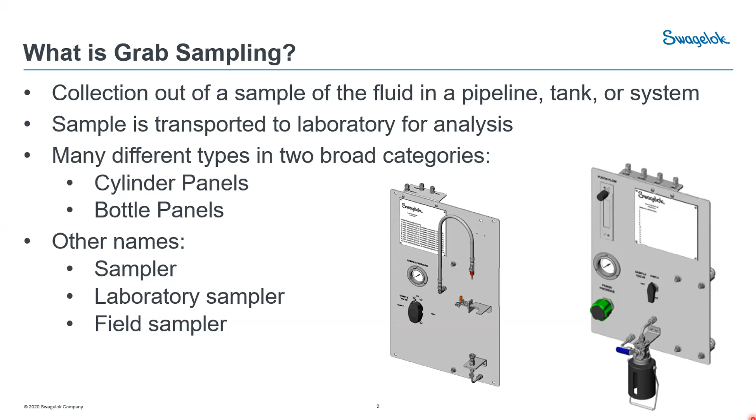Sampler is probably one of the more common ones - lab sampler, field sampler - but that all amounts to the same basic thing. So why are we actually taking a sample? There are a lot of different reasons why you might need to take a sample. One is, of course, to validate the process conditions, making sure that the product you're manufacturing meets the specification, either at the end of the process or at some point in the middle, coming out of one unit and heading into another, making sure you're delivering product as expected.

It could be that you're validating online analyzers. So for example, anytime you have an online analyzer installation in the field, chances are you have a grab sampling installation as well to validate the results of those analyzers periodically.

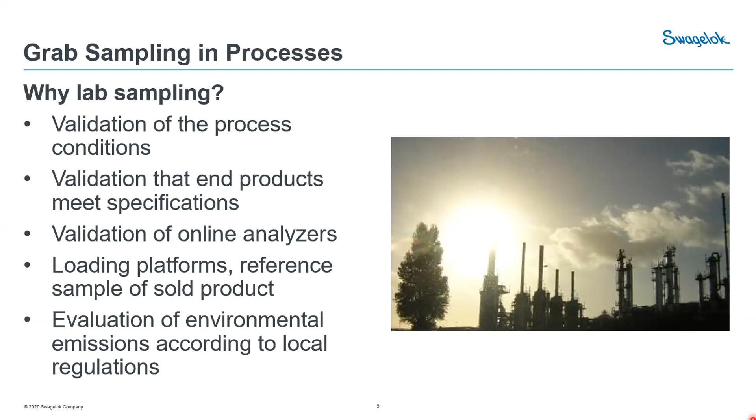Loading platforms is another popular one, where anytime you have a change of custody, very often you're going to be taking a reference sample so you can go back and analyze it later if there's a problem. And finally, environmental concerns are growing - no matter where you are in the world, regulations are only increasing with regard to emissions. So measuring the flare gases and things of that nature is definitely one of the great applications for grab sampling.

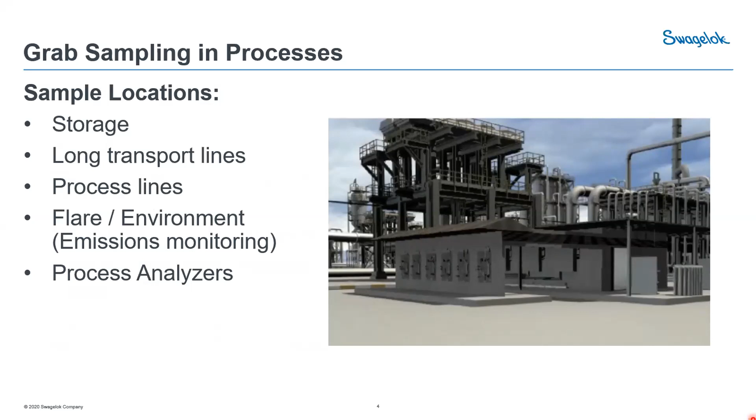With all those different applications, you're going to find these samplers in a lot of different places around your facilities - whether it's at storage facilities out at the tank farm, on transportation lines between facilities or from one unit to another, or on the process lines within the facility. We just mentioned the environmental aspects, monitoring emissions, your flare gases, and we also mentioned the process analyzers and validating those process analyzers.

So what is the difference between grab sampling and an online analyzer? There are a lot of different pros and cons in terms of one versus the other. So let's take a look at some of those.

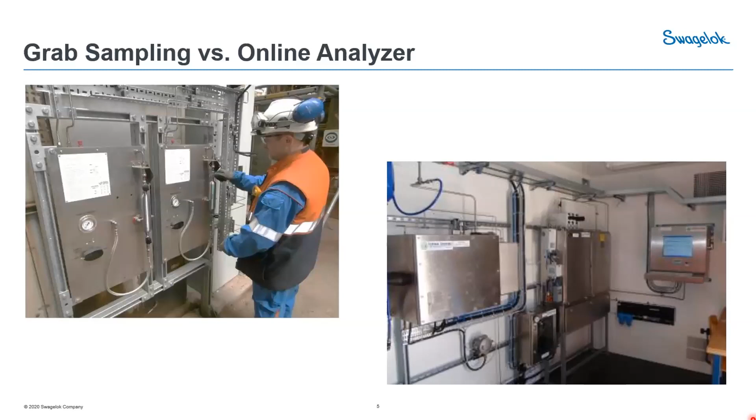So grab sampling - one of the great advantages is it's much less expensive. You're able to have multiple grab sample panels all feeding a single analyzer back in the laboratory. So the cost of the grab sample panel and the cost of that installation is significantly less than when you have an online analyzer.

It can generally be installed much closer to the process. With a grab sample panel, it's relatively small - you can fit it usually within a few feet of the process line, or at most maybe 50 feet away. With an online analyzer installation, it's generally going to be installed in some sort of shelter, and you have to find some real estate to build and install that shelter. So those are generally going to be much farther away from the process, from the sampling point.

And also it allows you to concentrate your laboratory expertise in the laboratory, your analytical expertise, so you don't have to distribute that throughout the facility and have those experts going around to maintain and take readings from different analyzers.

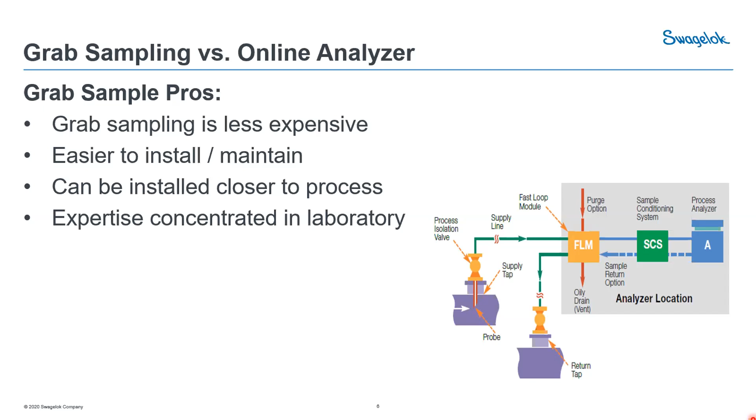Now, of course, there are some drawbacks to grab sampling. The biggest one is time delay. With an online analyzer, you can get essentially real-time results - the gold standard is that you can get a result within 1 minute of extracting that sample from the process. With grab samples, obviously you can't do that. There's a significant time delay between when you take the sample, collect it in the sample container, and then by the time it gets transported back to the laboratory and has to be in queue there, it could take hours or sometimes even days before that sample actually gets analyzed.

It's also harder to maintain the sample at the process conditions. Even though it's relatively close to the process, by the time you get it into that sample container and transport it, and wait through all that time delay, it's harder to maintain that sample at the phase, temperature and pressure conditions of the process. So it might not be representative anymore.

And it's potentially more dangerous. By their nature, grab sample panels introduce human beings into the sampling process, so as a result you are inherently making this a more dangerous operation than an analyzer that operates by itself remotely. And then, of course, sample purity can be an issue if the sample containers are not properly cleaned and maintained. So some potential problems there.

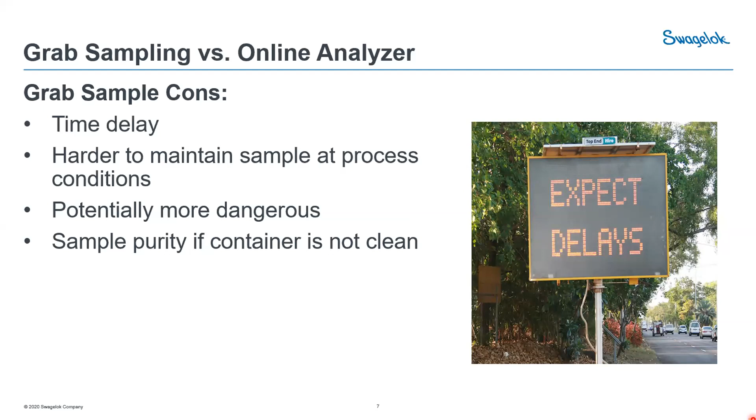Let's take a look at some sampling system basics. There are a few different rules of sampling. First of all, we want our sample to be representative, meaning we want to make sure that our sample is essentially the same as what it is that's in that pipeline.

So we want to avoid phase changes, because when we start changing phases from liquid to gas or vice versa, we fundamentally change the sample itself. So we definitely want to avoid that.

We want to use probes where we can to make sure that we are sampling from the middle of that pipeline, and not taking it from the wall of the pipe. If you're sampling on the bottom of the pipe, you could potentially be collecting contamination. So using probes helps with the representativeness of the sample.

We also want to be timely with our sample, to the extent that we can. Obviously, grab sampling and transportation is not as timely as, say, an online analyzer installation, but we still need to get the sample from the process to the panel in a reasonable amount of time. And we need to understand how long that time is, so that we know what sort of process corrections we need to make based off of those results.

Also, we need to make sure that our sample is pure. We don't want to contaminate the sample. We want to avoid dead legs, make sure there's adequate purging and flushing, and make sure that we use clean sample containers.

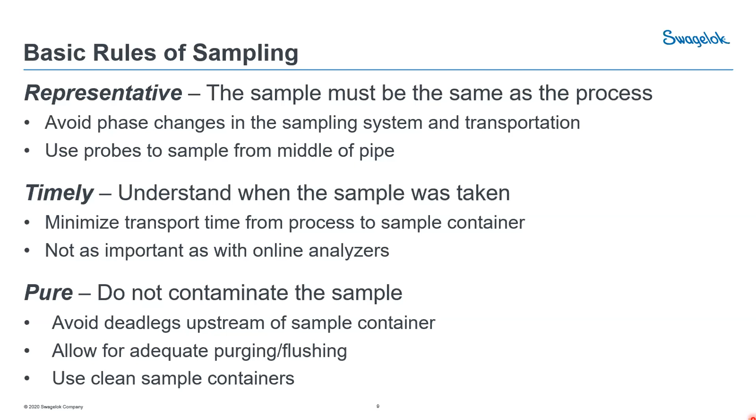So anytime we have a pressure gauge or something like that, we want to put that on the downstream side of the sample container. That way we're not contaminating our sample.

We also need to understand the behavior of our samples. We need to understand that a gas is compressible, but a liquid is not, and we need to understand how changes in temperature and pressure are going to affect our sample. For example, with a liquid sample, as we increase temperature or decrease pressure, we can potentially vaporize out some of the lighter components in our sample.

So if we have a sample that's here in our phase diagram and we decrease our pressure, what's going to happen? Some of those components might move into the gaseous state, and now we've changed phase and potentially fundamentally changed our sample. Likewise, with a gas sample, you have to worry about dropping the temperature or increasing the pressure - the same thing can happen, going from the gas phase and condensing into a liquid phase. We definitely want to avoid that phase change because it can and will change the composition of the sample.

So anytime we can maintain the sample at the operating or process temperature and pressure, it's to our advantage, because at that point we're avoiding changing that sample.

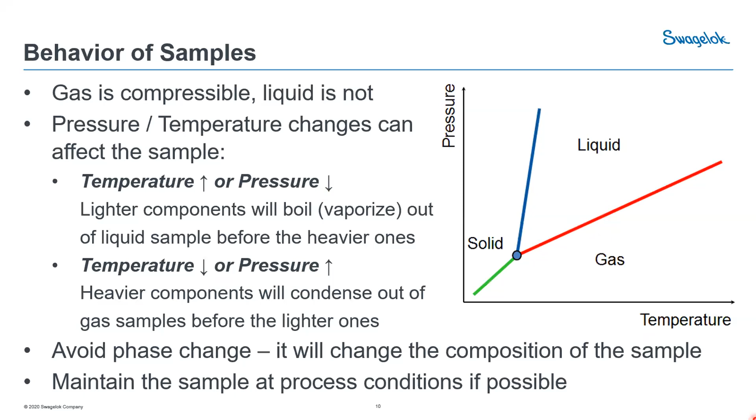So we talked about the two different types of sample containers, two broad categories: sample cylinders and sample bottles. How do you make the selection between one or the other? Well, cost is certainly a driver. Bottles are definitely less expensive than a sample cylinder.

Also, you have to worry about the sample pressure. If it's something we have to hold at a pressure in order to maintain the process conditions, then a bottle is not going to be suitable, because bottles are not intended to be pressure containing.

Also need to worry about things like toxicity. The toxicity of the sample is definitely important - you'd want to steer towards a sample cylinder in that sort of application if you have a really toxic sample. It's just a more secure way of transporting something that could be hazardous to personnel or to the environment. And of course, we need to worry about that sample volatility.

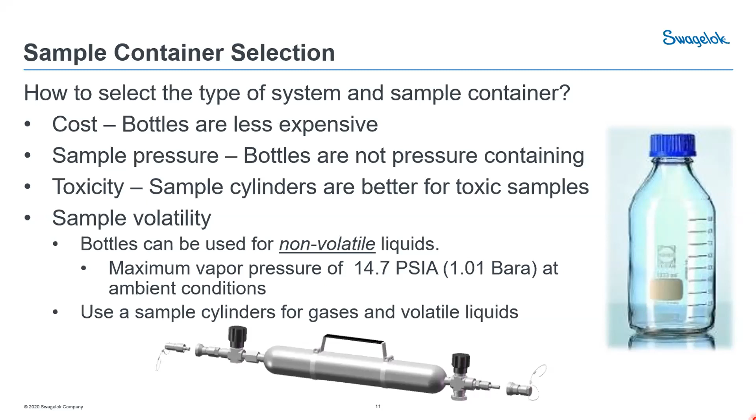If we need to hold that sample at pressure in order to keep the liquid from vaporizing, then again, a sample cylinder is the way to go, because that sample bottle is not intended to be sample or pressure containing.

Looking at an example that most of you are probably familiar with, we have a distillation column here. You've got the basic function of the refinery: the crude oil comes in, you boil it at the bottom, and then you recondense at different levels, and different products come out at different levels. Up at the top, you have your real light gases, your LPGs, your methanes, that sort of thing coming out at the top.

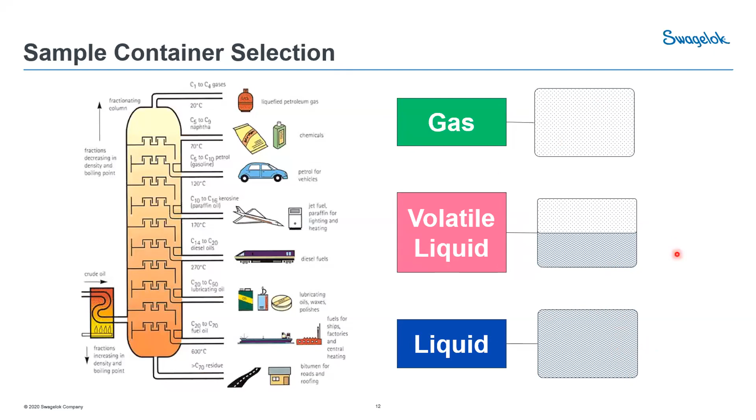Down at the bottom, you have your real heavy things. Those are always going to be liquid. And then here in the middle, you have your volatile liquids. So this is where you need to worry about what sort of sample container you're going to use. Gases, obviously, we're going to use the sample cylinders. Liquids, we're definitely going to use the bottles, unless it's toxic. But here in the middle, it's kind of up in the air, so we have to look at the vapor pressures and the boiling points.

So here, looking at a list of different hydrocarbons, we can see our atmospheric boiling points for all these different hydrocarbons. And if we look at pentane, for example, we see it has a boiling point of 36 C. We're probably going to be able to get to that boiling point pretty easily, especially down in Alabama - maybe not up here in Cleveland, but definitely down there. So definitely have to worry about that being a volatile sample.

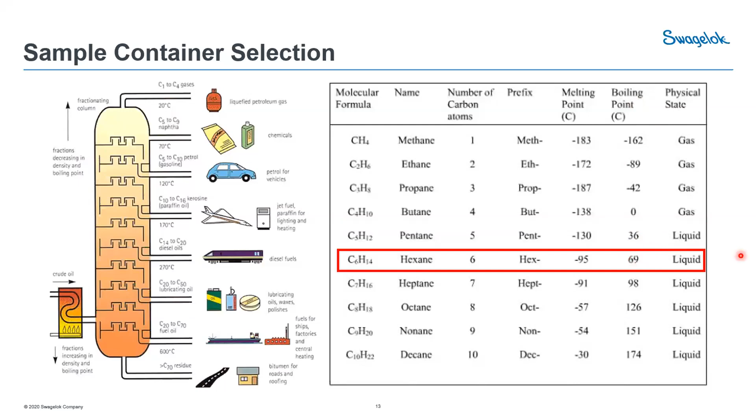Whereas hexane, we've got 69 C. Not much chance of getting to 69 C in atmospheric conditions here in the United States or anywhere in the world, really. So that's about where we draw our distinction, between hexane and pentane. Anything above that line, you really need to use a sample cylinder to keep that sample contained. Anything below that line, those are your heavy liquids, your non-volatile liquids, where you're not worried about that sample vaporizing.

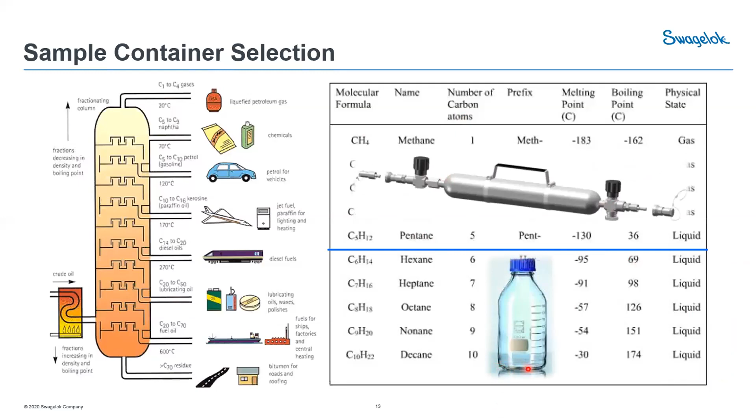At this point, I'm going to hand it off to my colleague Eric Kavarda, and he's going to talk about some standard sample system designs that we've developed here at Swagelok.

One of the main features of the grab sample module is what we call our geared valve assembly. Now what we've got here is a single handle that turns the positions of 3 different valves. So if we were to look at this grab sample panel, and it may be engineered locally or it may be engineered 20 or 30 years ago, the operator may have to come in and turn 2, 3, 4, 5 valves in order to sequence the valve operation in the right way so that the sample is taken in the proper container and it's taken safely.

Well, that's a lot of decisions to make when somebody comes up to a panel. So even if the instructions are well laid out right in front of them, there's still an opportunity for that operator to perhaps make a mistake. And as Matt mentioned, if you have some toxic or dangerous liquids, that could potentially put them at risk. So what we've done is combine that function into one geared valve assembly where you can see one handle. That CAD drawing in the middle has some gears that all rotate together and turn those valves to the correct position at once - a much safer way to do it than if an operator had to turn multiple valves in a certain sequence.

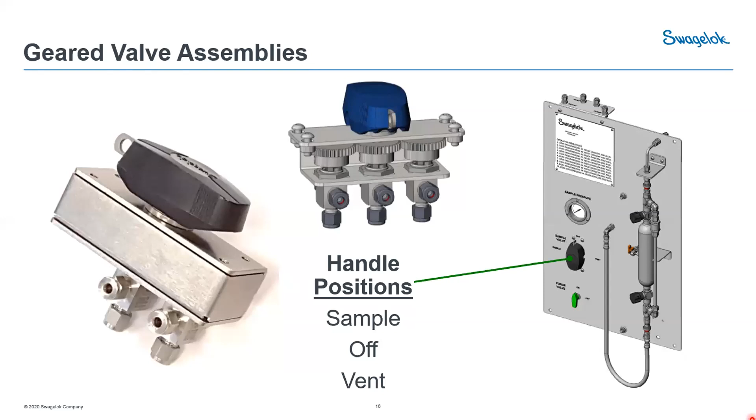Within the GSM product line, we have different options, so it's a fairly configurable product line. We have two different flow paths: one is a standard flow and one is a continuous flow. We have different selections for liquid or gas. You cannot generally use the same sample panel for a liquid versus a gas application. There's a principle I'll get into in a little bit that'll explain that.

For systems where you have something that's very toxic or unsafe, you may want to run a purge line. In the case of a liquid, you could purge it potentially with water or some sort of solvent. In gas, you're generally going to purge that with your plant nitrogen. So we can offer that as an option in the panel.

And then of course the cylinder sizes, it's completely up to the customer. There's a wider range of cylinder sizes available, from small cylinders in the 150 cc range up even beyond a 1000 cc sample cylinder. Quick connects are the next choice to make.

Swagelok has a few different quick connect lines, depending on whether you want elastomers in there or if you need an all Teflon seal in your quick connect, we can provide that choice.

And then there's a relief valve option for safety. If something were to happen and the panel becomes overpressurized, this is an area where an operator is going to be standing right in front of that. So if there's an upset condition and the operator is standing in front of that panel, we want to be able to relieve that pressure and certainly not have it potentially harm the operator.

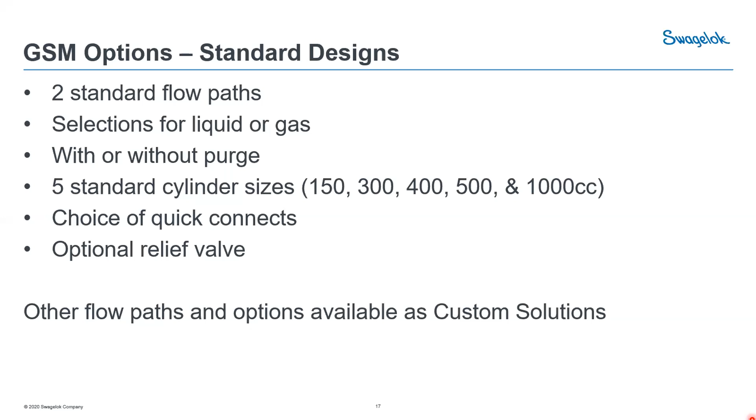And these are our standard designs, and then there's always the custom ones. So one concept, we're not really limited to what you see on these slides here. We can do something that's custom from the ground up or from a napkin sketch.

So let's talk about liquid versus gas a little bit. The main difference between a liquid sample station and a gas sample station, and again we're talking about sample cylinders here, is that the liquid is going to fill from a different direction. In a liquid system, you're generally going to want to fill that liquid from the bottom up through that sample cylinder, while in a gas system, you're going to want to fill that cylinder from the top down.

The main reason you want to fill a liquid system from the bottom up is there's going to be trapped air in that sample cylinder when you install it, and that air needs somewhere to go. If you were to fill that sample cylinder from the top down, there's a pretty strong potential that air wouldn't go anywhere. It would just bubble at the top of the cylinder and it would be very difficult to flush all that air downward. So in the liquid system, you fill it from the bottom up and it allows the air to easily escape, and if you have an outage tube, it works perfectly with the function of that.

The gas system is the exact opposite. If you have any entrained liquids or some dirt or solids in there that you want to flush out, filling that with the gas from the top down will allow gravity to do its job and take those particles and push them out the bottom of the cylinder.

Another feature you may see that's a little bit different here is where the hose is located. Often there's going to be a hose on the grab sample panel. One end of the sample cylinder is going to be tightly fixed to rigid tubing, while the other one's going to have a flexible hose. We always want to have that hose downstream of the sample cylinder.

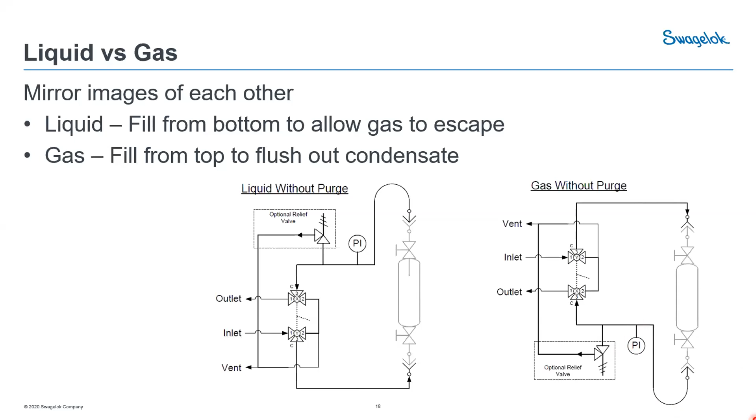The same concept applies with the hose. If it's a smooth bore Teflon hose, maybe not so much of a concern, but if we're talking about a flexible metal hose with a lot of corrugations, those are very small dead legs, an opportunity for old fluid to get trapped in there. And with old fluid, if you're filling it in the opposite direction, that could contaminate your sample, or at least make it a very long time until fresh sample could be assured to be in that sample cylinder.

Another great feature is that these are highly configurable. So if we were looking at our application guide, in other words our catalog for this product line, we'd be able to go and make a few different decisions and completely configure the standard product on this.

So smart part numbers, the GSM, we're making a decision whether it's a gas or a liquid. Is it a standard or a continuous flow? Then there's a pressure gauge, so what's the range on that? We're then selecting quick connects. We're selecting if we want a relief valve or not. And then we're selecting our cylinder size and whether it's a purge system.

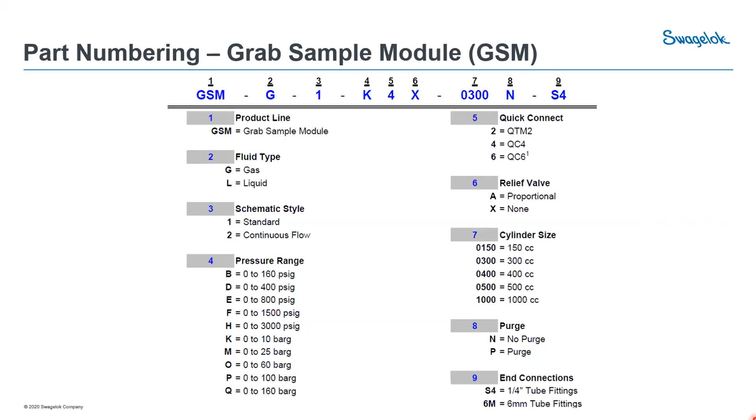And I assume mostly here in the United States, we're going to be working with quarter inch tubing, but when we're talking about our overseas customers, they generally want to convert that to metric at the edge of the panel.

So let's look at what the P&ID looks like for some of these systems. This is the GSM, and it's a standard flow, and it's a liquid module. This is what the P&ID would look like if I were an operator walking up to it. That sample valve, that geared valve assembly, would be in the off position.

Now, the first thing I'm going to do is walk up, and maybe the cylinder is already installed. Often the hose would just be connected to the other quick connect, or there may be a cylinder in there, or I'm going to grab a cylinder out of the bike or out of the truck and install it. And then I'm going to move this towards the sample position.

As we do that, we've got some fluid coming in that inlet, and it slowly fills up that cylinder. A good sample procedure is to wait a little bit of time, maybe one to two minutes if possible, just to ensure that anything that was in that sample cylinder flows out the top so that the sample you're taking is as fresh as could possibly be.

So after the sample cylinder is filled up, I'm then going to turn that position again to the off position. And now the panel is completely isolated. The cylinder valves are not closed, but the panel is completely isolated from the process, and there's no flow going through there. But I can't yet remove the sample cylinder.

I need to turn those sample cylinder valves off, very important. Even though the quick connects at the end of the sample cylinder may be what we call a double-ended shutoff, that would shut off when they're opened.

If you do that at a high pressure, you'll have a couple things going on. One is you get some natural spillage out of that quick connect. And the second is sometimes we'll exceed the pressure rating of that quick connect when it's opened or closed. One thing to be mindful of: the quick connects have a pressure rating when they're coupled, but often a lower pressure rating when they're being coupled and uncoupled.

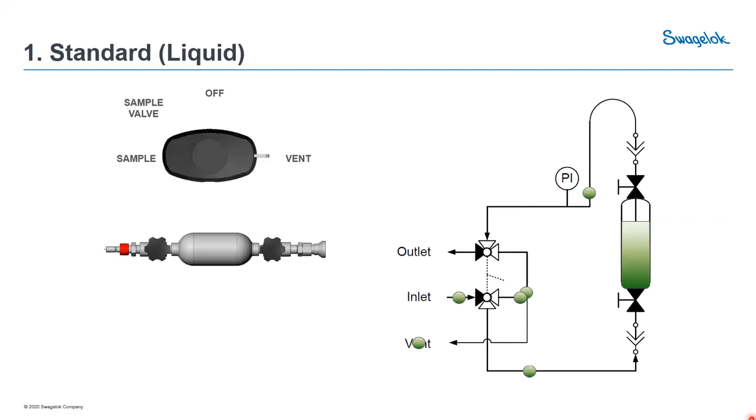So continuous flow, the main difference is that there's always flow through the panel. It's going in the inlet and coming to the outlet. It's not always going through the cylinder, but there's always flow through the panel.

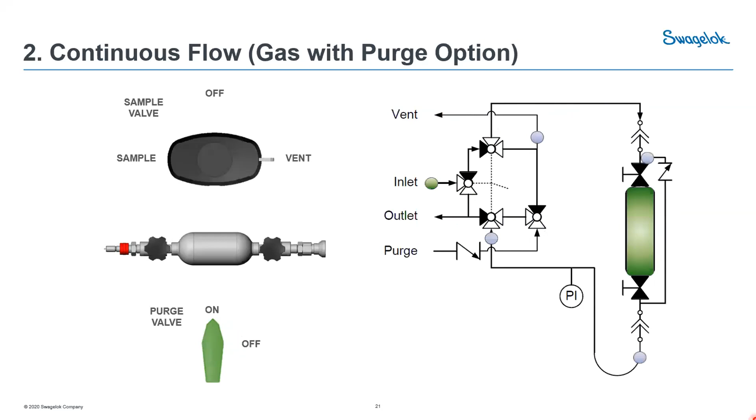Okay, let's look at the second concept here, which is the GSC, the grab sample cylinder. So often panels are purchased without the cylinder in place. The main reason is our customers would like one grab sample panel, or maybe they would like 10, but they'd like 2, 5, or 50 different grab sample cylinders, because there's often going to be a lot more grab sample cylinders than there are sample panels. So we generally sell those separately. They can be sold together, customized, but we generally sell them a little bit separately.

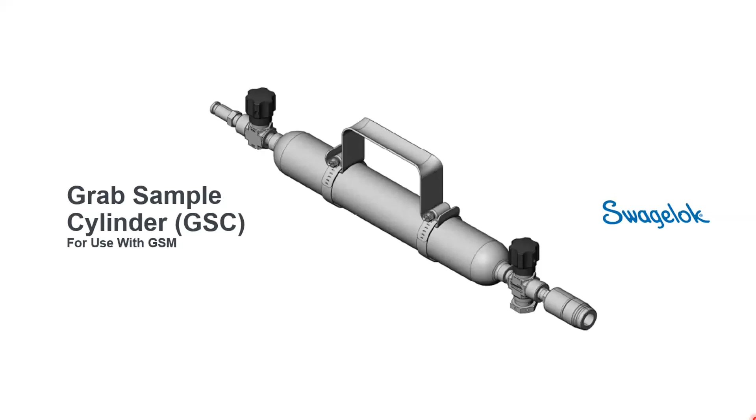So we have some different options for the GSC based on our 5 standard cylinder sizes, different valve ends. We have different materials of the cylinder, different materials of the valves. Stainless steel 304 or 316 is most common. Monel is also common, although not as common as stainless steel. If you are installing this into a panel with a purge, you need a sample cylinder with a purge option as well. And then again, we have the choice of different Swagelok quick connects that could go on there.

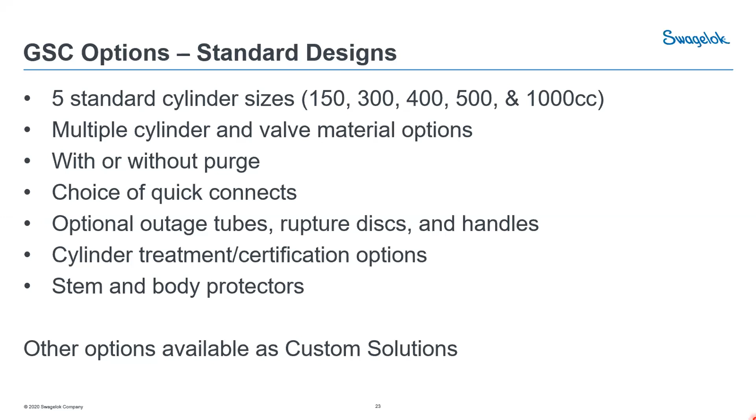If it's a volatile sample, you may want an outage tube. You may want a rupture disc also for safety. And then you may want a handle on that cylinder so you can carry it around with ease. Different cylinder treatment or certification options. A treatment may be Silcosteel inert coating or Teflon coating. And then it's not uncommon to have stem and body protectors on those quick connects, so the customer or the operator can couple something to that. As it's being transported, it's just a better option to keep those safe and keep those protected. And then of course, almost any option is available as something that's a custom solution.

Then our third system is the GSL, the Grab Sample Liquid. And this is for the liquid bottle style. So we would not be using this generally for a gas system. Within the GSL system, now we have 7 different standard flow paths, from extremely simple to quite complicated. I'm not going to go over all those 7 right now just for the sake of time. But we do have different options.

It's not uncommon for liquid sampling to need a sample cooler, primarily for operator safety. As Matt showed, this could be a glass bottle or a plastic bottle. And if you have a sample fluid that's very hot running through there, you could exceed the temperature rating of some of your elastomers. Or maybe even more importantly, if your operator grabs that bottle with a bare hand, they could burn themselves. So we want to make sure we keep the operator safe. And to do that, we can run a sample cooler upstream, basically the first component on the system to cool that sample down to something that's a lot more safe and a lot more manageable. Different bottle sizes, small at 50 cc's all the way up to about 1,000 cc's, and different materials. Viton is pretty much standard. FFKM or Kalrez is another option as well.

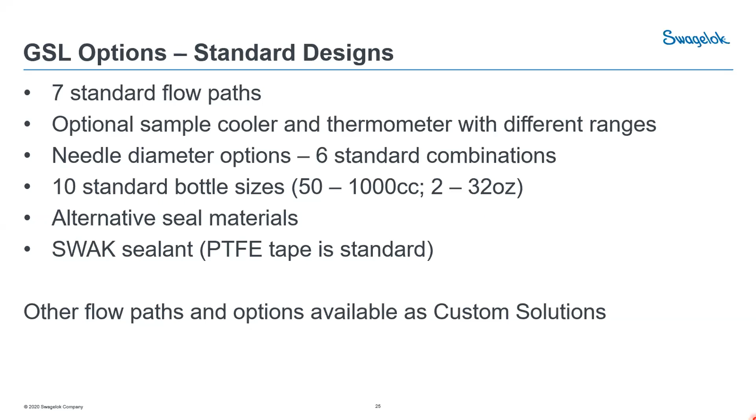The idea of the fixed volume sample is to only put a certain known volume into that sample bottle when the sample is being taken. The risk of not doing it this way is potentially overflowing that bottle, which in the case of sampling water is okay—if you send some extra water out that vent line, you're not going to hurt anybody. But if it's something you don't want to waste, or you cannot send liquid sample out of that bottle, you want to make sure you have just a specific amount of sample in there, we would look at something called fixed volume sampling.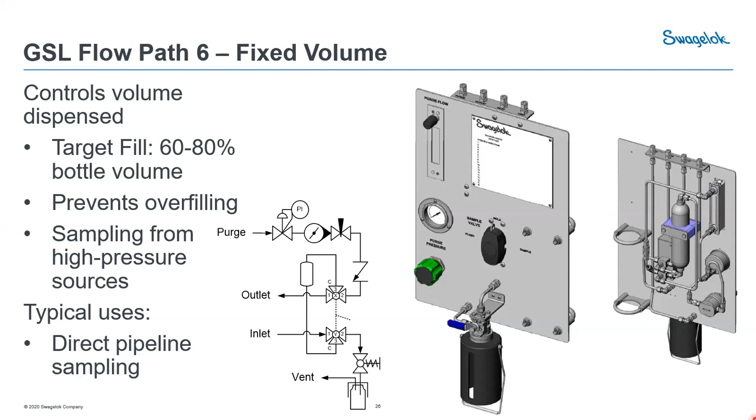This fills the target of the bottle, I think about 60 to 80%. Again, it prevents some overfilling, and is very common when sampling from a high pressure source.

So this is what that P&ID looks like. If I'm the operator, I'm going to walk up to that sample panel. There may be a bottle in there, but I'm probably going to get a fresh bottle and install one in that shroud, and there's a stirrup holding that bottle in. Then I'm going to turn my geared valve assembly, and see what happens here.

The sample is coming through the inlet, and it's taking a little bit of a turn at that first valve, and that green cylinder is our sample cylinder that's on the panel. Now, it's not a sample cylinder you're going to take off the panel and go to the lab like we saw earlier. This is something that's fixed in there to really provide and maintain that fixed volume.

You could probably do that with maybe a piece of large diameter tube, but it's a lot easier to do with a sample cylinder. So I'm going to allow this to flow for a little time, maybe a minute, maybe 2 minutes. It's going to flush anything out of there that may be old, and ensure that there's fresh sample running through that system.

And once I'm assured that I have some fresh sample, I'm going to turn that valve again. Now I'm going to turn it to the sample mode, which does a couple things. One, it exposes that fixed volume to be able to fill into my sample bottle.

And secondly, I'm going to use this purge line. Now, this purge gas is typically lower pressure, maybe only 5, 15, 20 psi plant nitrogen. Even if you have a high pressure liquid captured in that fixed volume, as soon as you drop that volume just the slightest bit, since liquids are generally incompressible, it's going to drop pressure.

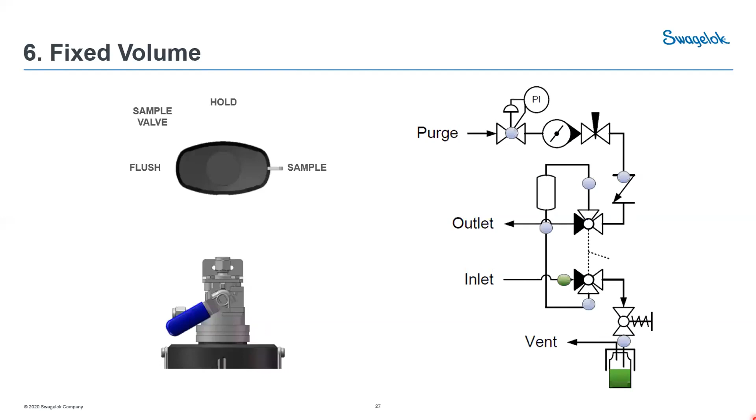So much like a beer tap, they're going to open that up and fill their sample bottle with whatever that fixed volume was, being pushed out by the purge gas. So when I'm finished, I have a bottle that's filled to the right level through the right selection of volumes. I've assured that I'm not sending any of my fluid in a liquid state to that vent line, and I'm properly purged, so I'm ready to take that bottle out and send it on to the lab.

And lastly, just a feature of generally the designs that we create—we hear from customers that they love instructions. It's very difficult for an operator to come up to a sample panel that maybe was engineered quite some time ago by somebody else who knows exactly how to run it, and they want to be able to see step-by-step instructions. So we're happy to put just about as much information that will fit on the panel.

Often these are an engraved placard, so that over time in the weather, if it was silk screened or something like that, it may peel off and become useless. We could put the P&ID on there for you. We could put a bill of materials, spare parts list, all kinds of information that'll make it easy to not only use the panel but maintain and service it when the time comes.

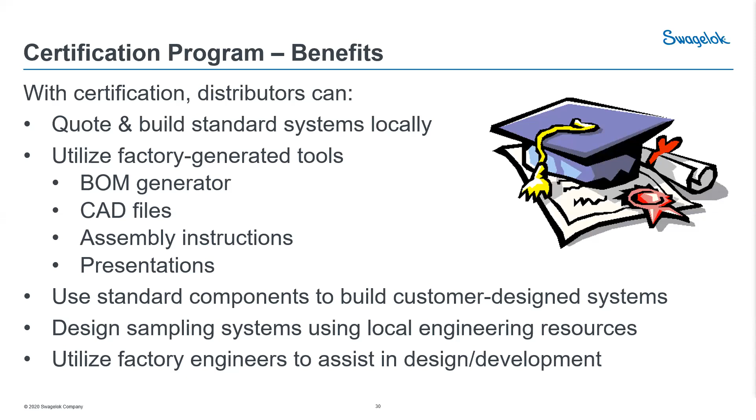So each of these systems is able to be configured locally, and each of our distributors is able to provide the expertise once they go through those trainings and support their customers. The systems also can be assembled locally to help with the speed and requirements of the customers, and also make sure that all our distributors are providing the same level of service globally.

Each of these systems has been designed to keep the sample in its representative state. It can be adapted and configurable, as Eric mentioned, to meet specific needs. So each design that you have access to through our catalog can be configured and changed to meet your specific applications or requirements.

They can be easily operated, as you can see from what Eric and the team have mentioned. There is some design element that we have integrated into our systems that make it easier for the operator to manage or navigate through the systems and operate them.

One beneficial aspect for all our customers is the part numbering structure. It's more of a smart part number, we call it. So the same part number that you can purchase from any of our sales and service centers can be ordered from a different distributor, and you will get the same system as long as we follow the same part structure. Each of the systems is also backed by our Swagelok lifetime warranty.

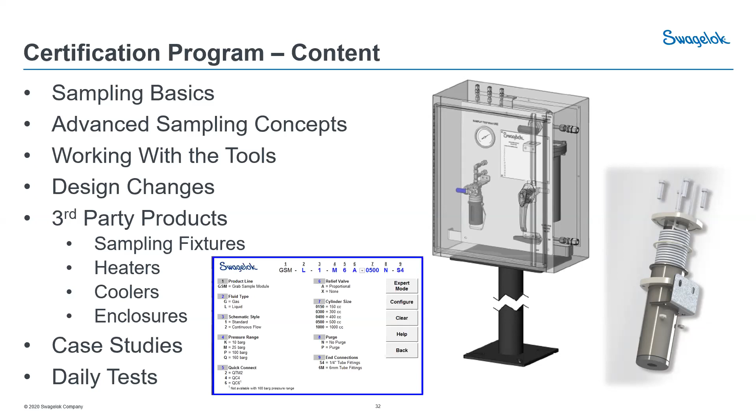Each of the systems goes through the standard tests put in place by the certification program. But if there are tests you require that are not standard or common, our distributors can accommodate those.

Each of these designs can be changed or modified. I'll go through some examples, but what you see here is a different configuration than our standard, where all the mounting has been requested by the customer to put in front of the panel for easy access. Also, for locations where specified, they wanted to mount them specifically on a wall to have access to the plumbing directly.

Some applications have a need where media can expand in the cylinder and you want to be able to extract the sample. There are opportunities to modify the GSC offering and make it more configurable to meet the specific needs of the applications.

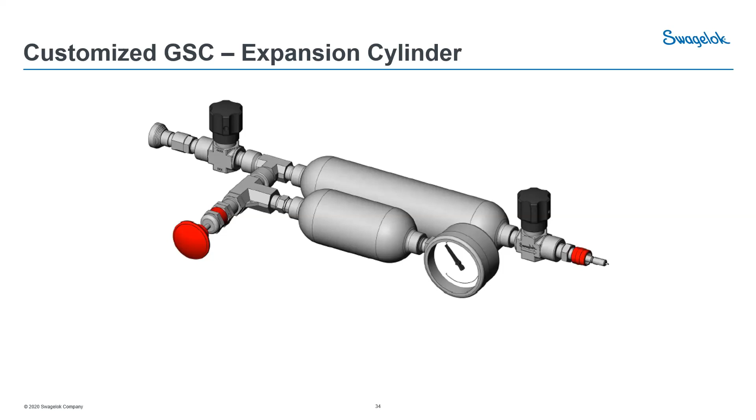There might be some applications where you would like to have a combination of coolers, like a third-party component, in addition to enclosures. Certainly those can be easily integrated and can be generated with CAD files and drawings and specific details and BOM by the distributors, and provided as a package for your need.

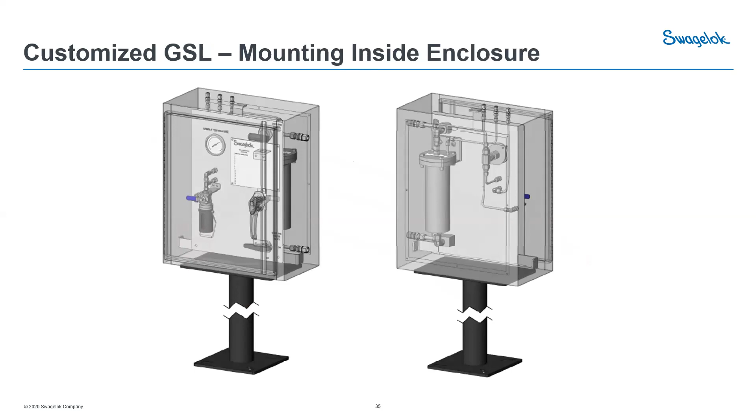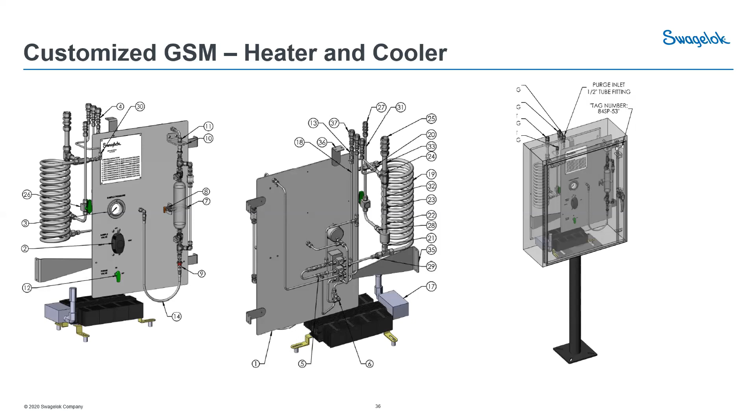But it can also be a combination of everything, like the enclosure, the cooling, the heating, depending on specific applications, need and requirement. As you can see in this example, there are a lot of elements that have been integrated, third-party heaters, and also some cooling mechanism to make sure they meet the assembly and system requirements of the specific applications.

There are applications where you would like to see some pumps to drive the sample in the system itself. That certainly can be integrated, and it's something we have done and have experience with, and all our distributors are able to do so.

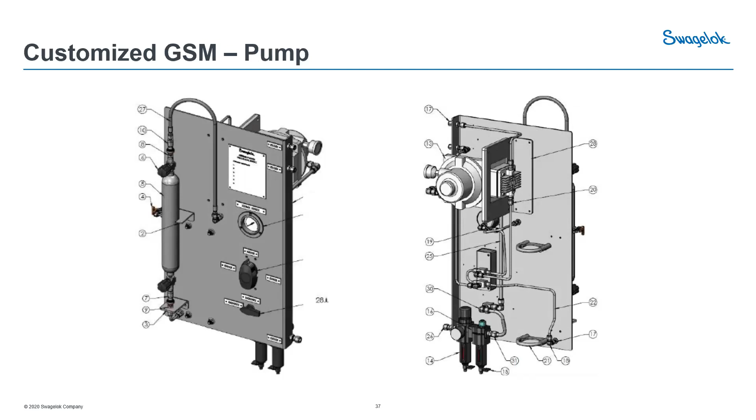Or it can be something very specific and unique, something that can be challenging for some customers. So what you see here is an ammonia sampler. Customers have some challenges with their applications to sample ammonia and test for water content. This is a unique solution we've come up with to help mitigate some of the safety aspects for customers, but also make sure the integrity of the sample is kept. And lastly, we have integrated an automation aspect to make sure the steps are controlled and sequenced to meet the specific applications.

So definitely certain things that are within our capability to help support specific applications and those unique, challenging applications you might have in your plant.